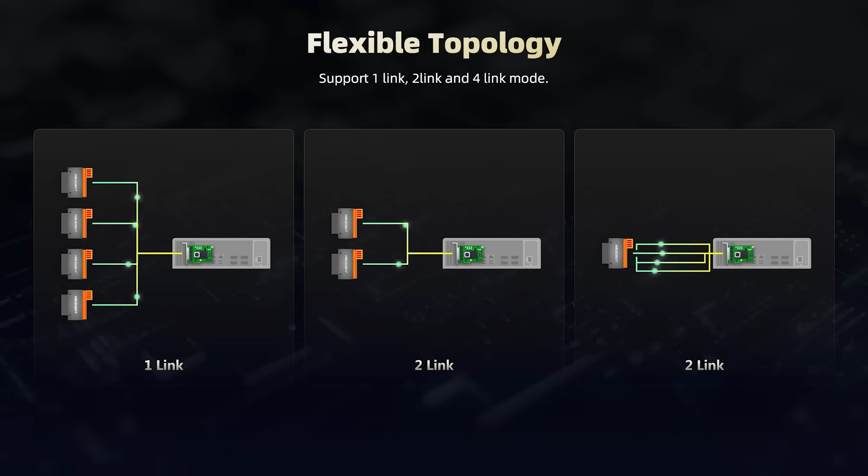Earlier we talked about the CoaXPress data interface with its high bandwidth capabilities, perfect for high-speed applications. However, the data cost can be a little bit high. That is why we are so excited to introduce our X over Fiber interface from Hikrobot. We hope this new interface will better serve our customers with a great balance between bandwidth and data cost.

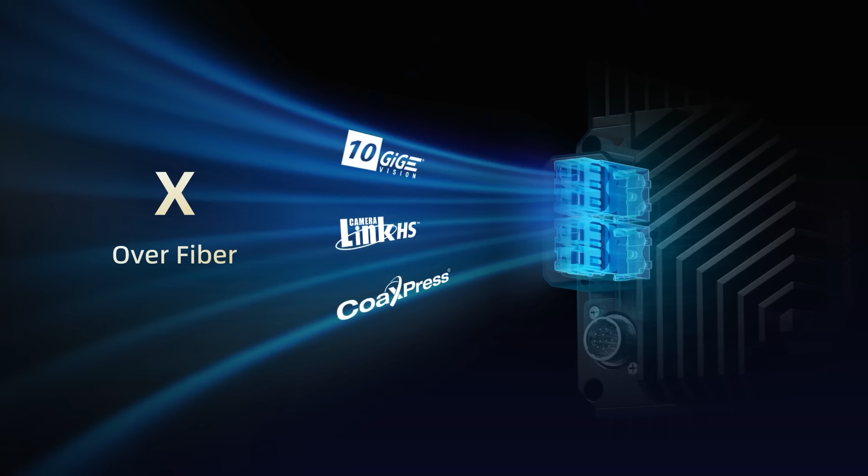Now, you might be curious: what is X over fiber? The second half of the name is pretty self-explanatory, indicating that this interface uses fiber as the transmission medium. But what about the X? In this case, the X represents high-speed interface protocols such as 10GbE, CLHS, CoaXPress, and even higher speed protocols in the future. By using X over fiber, we can standardize both the transmission medium and the form of the frame grabber, making it much easier for customers to choose the compatible product.

Besides its cost advantages, X over fiber also offers several technical benefits. As we can see, typical high-speed interfaces like 10GbE, CLHS, and CoaXPress offer similar bandwidth when using one copper and fiber as the transmission medium. However, since fiber optic links are easily aggregated, we can obtain 2 or even 4 lanes of fiber, providing us with even higher transmission bandwidth.

Moreover, using the X over fiber interface allows for a significant increase in uplink bandwidth. With greater uplink bandwidth, enumerating and connecting cameras can be done more quickly, and commands can be issued with faster response times. Ultimately, this results in a more fluent user experience for high-speed applications.

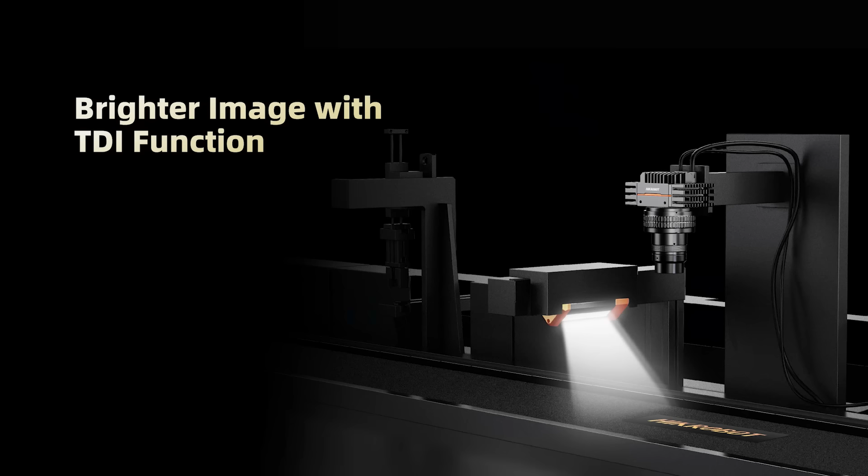As well as a color model with 66.6 kilohertz in RGB pixel format. For the monochrome model, the camera can capture brighter images with the TDI function. This camera supports 2 TDI mode, which will provide images with doubled brightness, meaning the entire system will have a lower requirement for the light source.

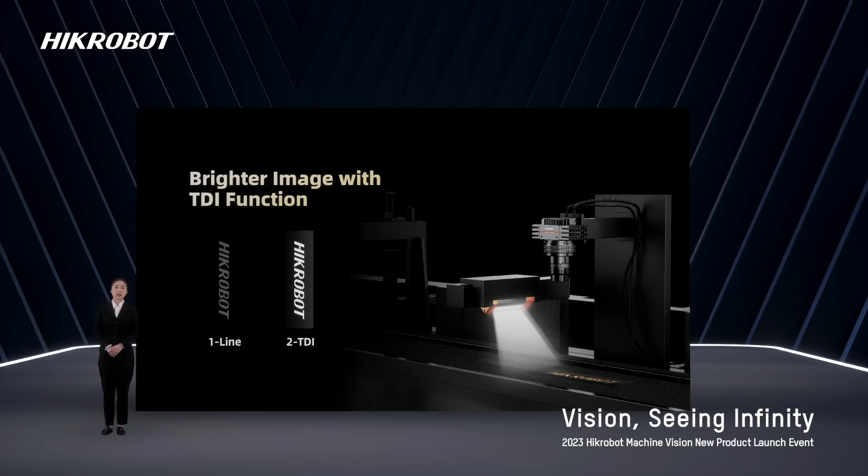Compared to 8K 5 micrometer pixel cameras in the market, our new 8K line scan camera, featuring a 7 micrometer sensor, delivers even better image quality. In one-line mode, there is already a noticeable increase in brightness, but when coupled with TDI mode, the image brightness shows even more significant advantages.

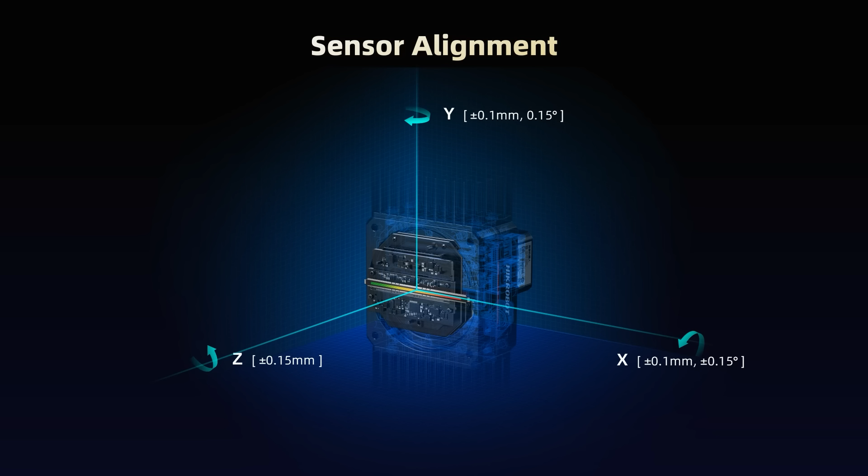In recent years, we have observed an increasing demand for higher imaging consistency among multiple cameras in many line scan camera applications. Therefore, in the manufacturing process of our 8K line scan cameras, we have made improvements by introducing high-precision sensor alignment technology and implementing strict controls on sensor installation. Now, we have achieved higher accuracy in rear focal adjustment, rotation, and translation to ensure imaging consistency.

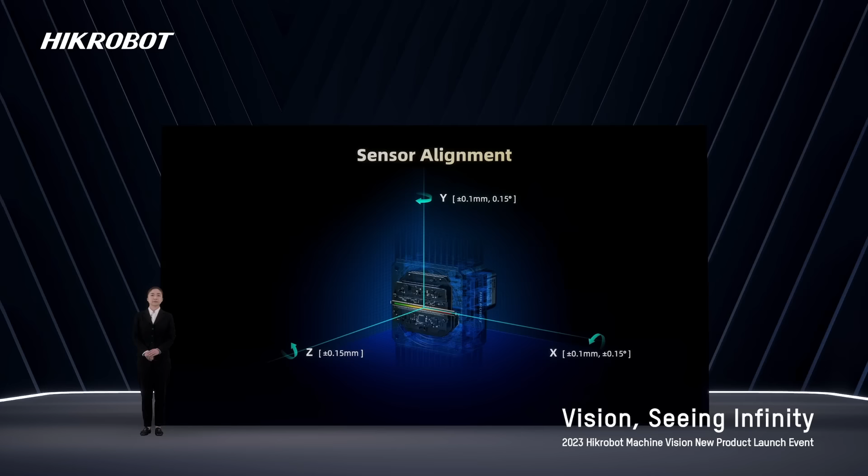Thanks to its high line rate, sensitivity, and true color capabilities, this camera is an excellent choice for inspecting webs on fast-moving production lines, such as printing materials, lithium battery, and other similar inspection applications.

The second line scan camera we have for you is a 16K true color high-speed line scan camera. It employs a 2-link X-over-fiber interface and can deliver a maximum line rate of 47 kHz in RGB pixel format. Furthermore, it also features 2 TDI mode.

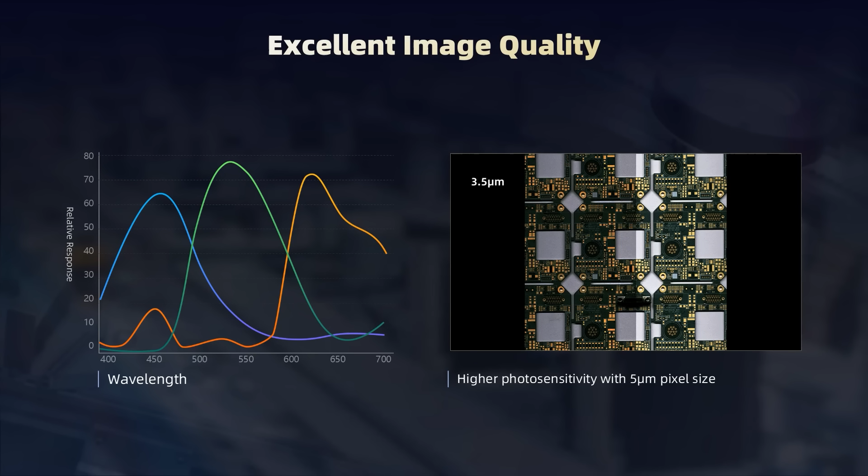Compared to the previous 16K camera with 3.5 micrometer pixels, this new camera has a larger pixel size of 5 micrometer, which makes it more responsive and sensitive. Under the same lighting conditions, the images with 2 TDI mode show a noticeable increase in image brightness.

The camera is also integrated with a rich set of ISP algorithms, including purple edge correction and a super palette, which lead to better color reproduction in general.

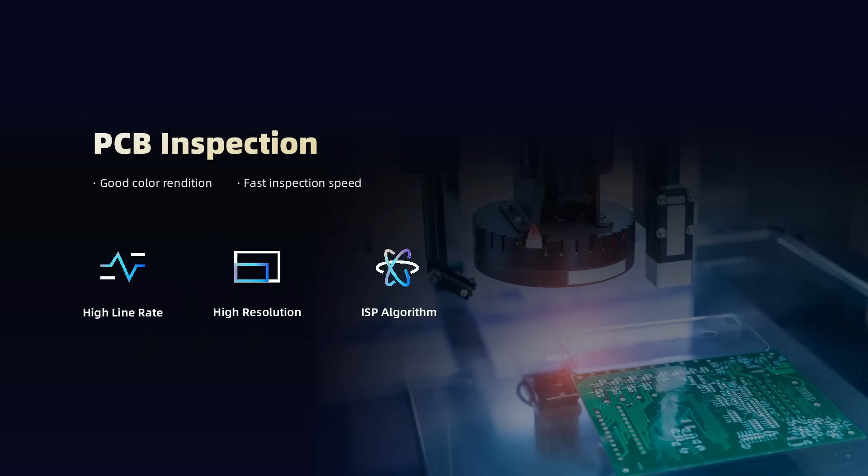In PCB AOI inspections, high color rendition, image accuracy, and fast speed are critical requirements. Additionally, as inspection precision requirements continue to rise, the bottleneck of using 8K cameras for image stitching becomes more apparent, and it's time to upgrade to a 16K camera. This product is an exceptional fit for these applications.

Next up is our final new product of this year's line scan camera lineup, and also the first product from Hikrobot that supports advanced 256 TDI, the 4K high-speed line scan camera. This one is equipped with a 5 micrometer pixel size sensor and can achieve a maximum line rate of 250 kHz.

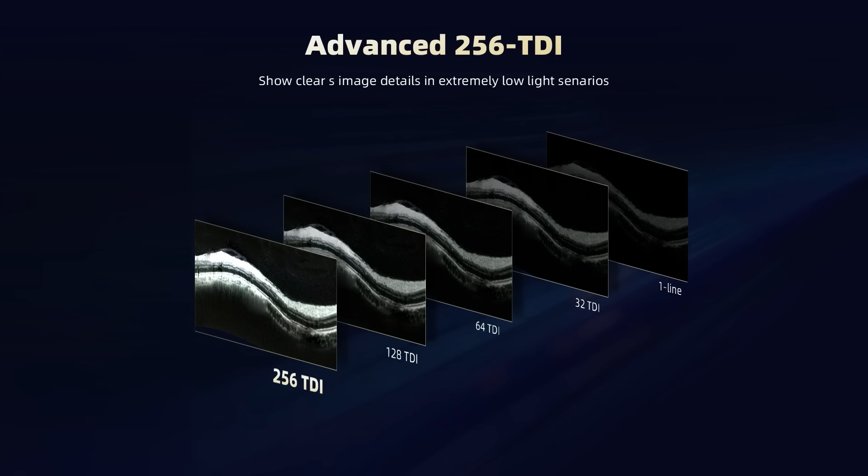Advanced TDI is just like the 2 TDI we introduced earlier, can improve image brightness. However, the 256 TDI takes it a step further for scenarios where the images are very dark, like in medical eye exams using OCT. In these situations, it is difficult to get enough light, and a normal TDI just doesn't do the trick. But with 256 TDI, the overall brightness of the image is greatly improved, especially for critical areas that need clear detection.

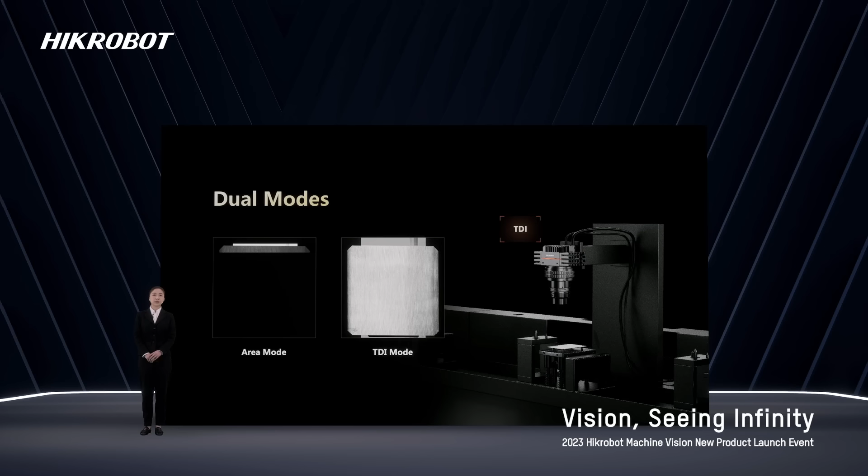This camera also supports dual mode, switching between area and TDI. In line scan camera applications, capturing a complete object requires relative motion between the object and the camera, which can be challenging to perform position calibration during camera installation.

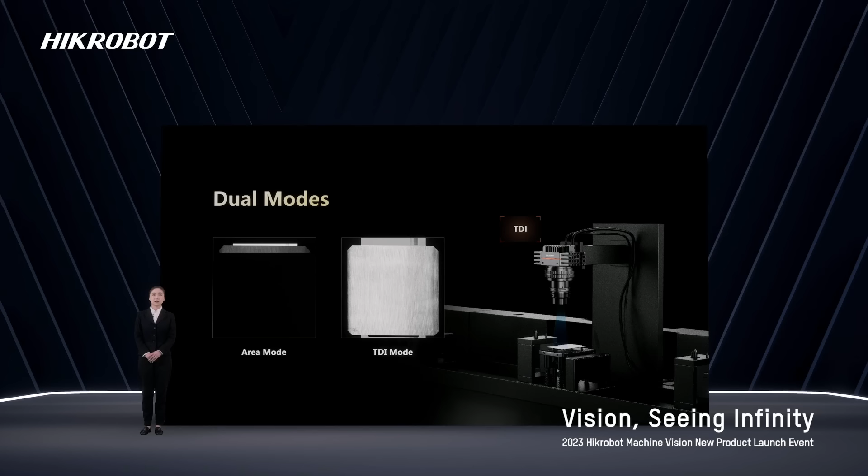To address this, we have developed the area mode for this camera, which means the camera can be used as an area scan camera and output a 4K times 256 resolution image. This image can show the object locating points easily, even when there is no relative motion. Once calibration is complete, the camera can then be switched to TDI mode for normal image acquisition.

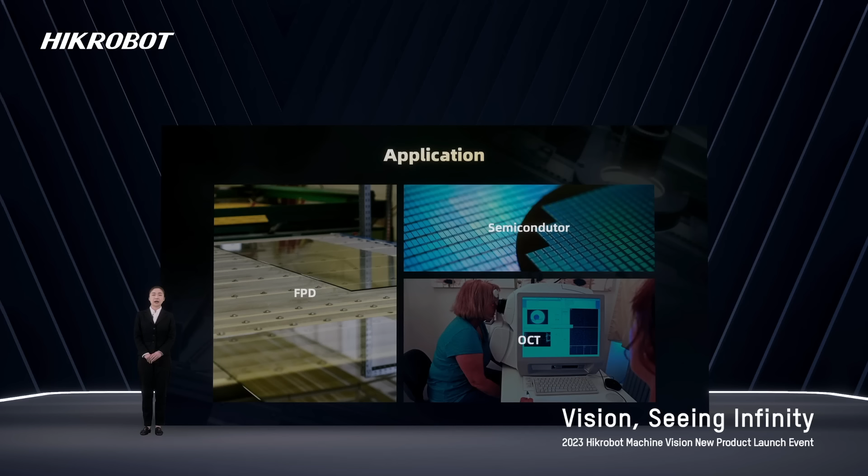The primary applications of this camera are flat panel display inspection, semiconductor wafer AOI, and ophthalmology examination. Beforehand, we presented camera products associated with the X-over-fiber interface.

Now we're thrilled to introduce the X-over-fiber frame grabber. This frame grabber can be used together with the camera products we mentioned earlier, and its dual-port design allows for a maximum data bandwidth of 20 gigabit per second. In addition, this frame grabber is equipped with an FPGA, which eliminates the possibility of data packet loss.

Moreover, several ISP algorithms like Bayer interpolation and color correction matrix are now supported on the frame grabber, which frees up the FPGA logic resources on the camera and the CPU resources on the PC.

Meanwhile, the frame grabber also comes with 24 I/O interfaces that can be flexibly connected to external devices, and signal synchronization between two frame grabbers is achievable. What's more, surprisingly, this frame grabber can be used as a signal generator, outputting signals as user-preset waveforms to trigger other devices.

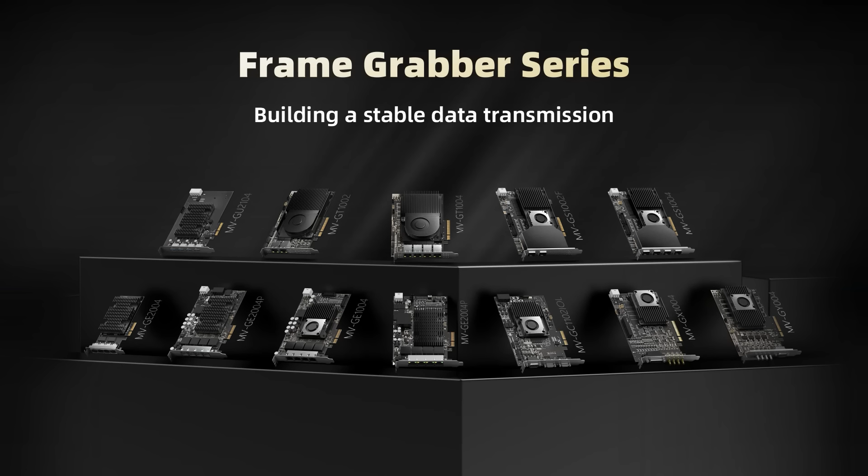In addition to this frame grabber, over the past year since launching the frame grabber series, we have continuously expanded and optimized our product series. Currently we have a very wide range of frame grabbers, offering interfaces including GigE, 10 GigE, USB, Camera Link, CoaXPress, and X-over-fiber.

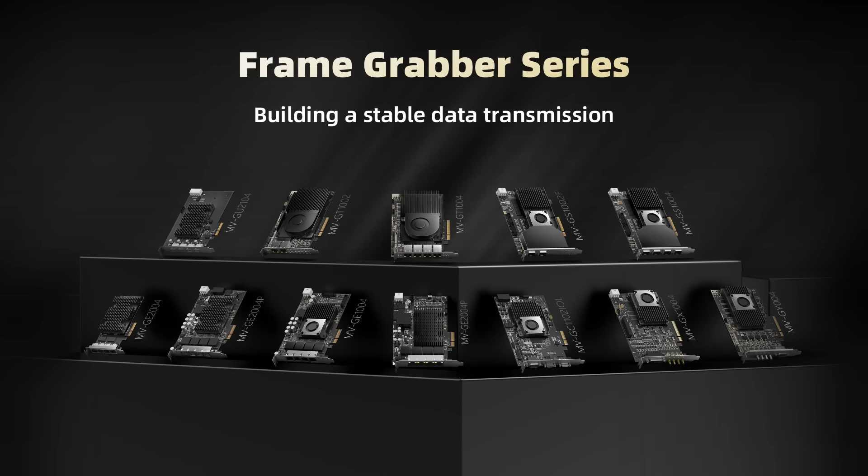For this series, we have made improvements in usability. We will release a toolkit to enhance the user experience. The toolkit consists of a variety of diagnostic tools.

The first one is a PCIe diagnostic tool, which supports exporting the current status of the frame grabber to help monitor and troubleshoot the PCIe bus.

The second one is a device diagnostic tool, which allows for monitoring of the frame grabber status. This includes monitoring I/O status and waveform changes, events received by the frame grabber, and the device running logs produced during use.

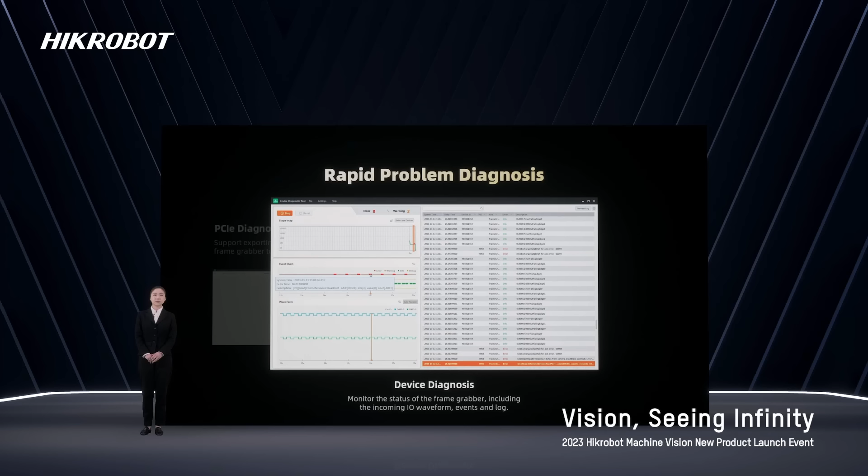The third one is a PCIe diagnostic tool, which enables detection of PC environment variables and the dynamic libraries that the frame grabber relies on. It also supports fast repair for the operating environment, making it easy and simple to use.

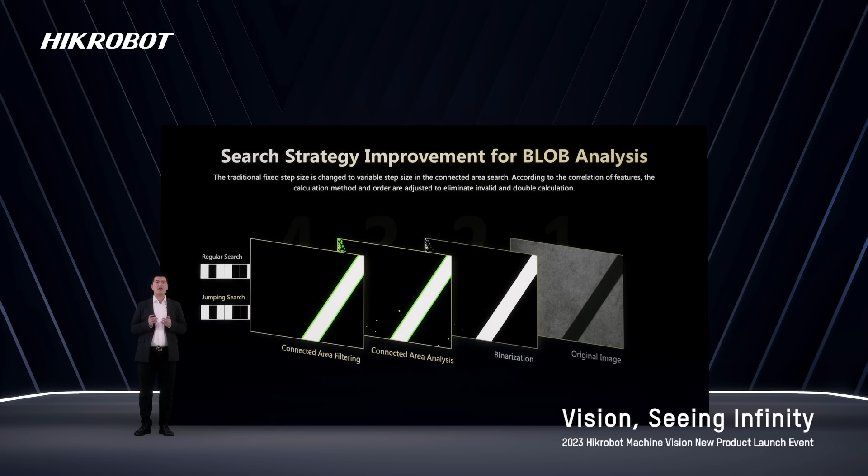Let's move to the blob analysis algorithm, which usually includes 3 steps. The binarization process is relatively simple, and the main time-consuming part is the connected area analysis and the feature calculation and filtering. In order to speed up, we improved the connected area search algorithm, changing the traditional fixed step to

a variable one by calculating based on the image features. In addition, after obtaining the connected area, when getting the features, we adjusted the calculation method and order according to the relevance of the features, eliminating ineffective and repeated calculations in traditional algorithms, achieving the goal of acceleration.

The optimized blob analysis has been improved in terms of time consumption and resource utilization, especially in large resolution images and large target scenes. For example, take the 8K times 12K resolution image. It contains around 80,000 connected areas, and it will only take around 80 milliseconds for blob analysis.

By adapting cache size blocks, deep coding, instruction sets, and assembly optimization, most algorithms in VM 4.3 also have a significant efficiency improvement.

In addition to algorithm efficiency, VM 4.3 has made many improvements in algorithm memory usage. By improving code implementation, operator encapsulation, and other methods, we have reduced the memory usage and redundancy, improved the memory reuse rates, and resource utilization. The memory consumption of most algorithms is significantly lower than that in VM 4.2.

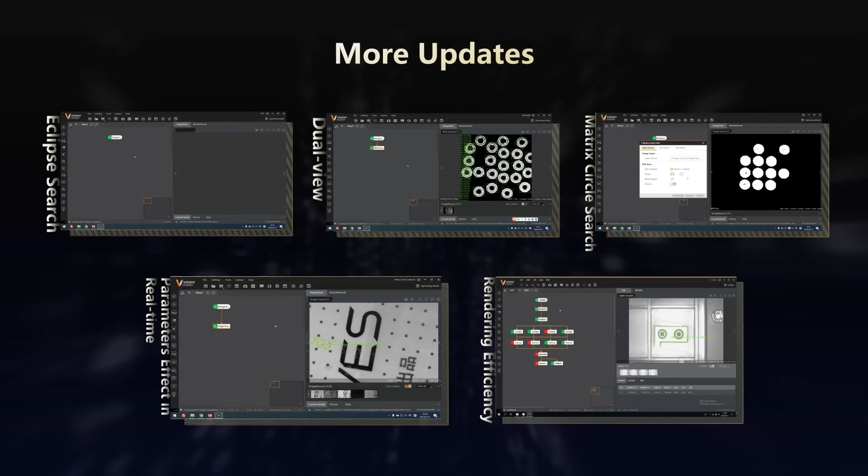Furthermore, VM 4.3 has added functions such as ellipse search, dual view configuration, matrix circle search, parameter effects in real time, and etc. And it optimizes and improves rendering efficiency to make VM more adaptable to diverse application demands.

Let's move to the hardware part. The ID product family has been continuously developed over the years, covering logistics, industry, handheld, and module series. Its performance also has been approved by our industry partners. We have never stopped innovating in terms of product and technology. And this year, we've continuously polished and enriched the series.

Today, we introduce the flagship product of the ID 3000 series, the ID 3000 XM, which shines in terms of performance, size, and usability. The ID 3000 XM is designed with various forms of status indications, such as top, side, and projected light. The current coding status can be observed easily from different angles, making it adaptable to more installation methods.

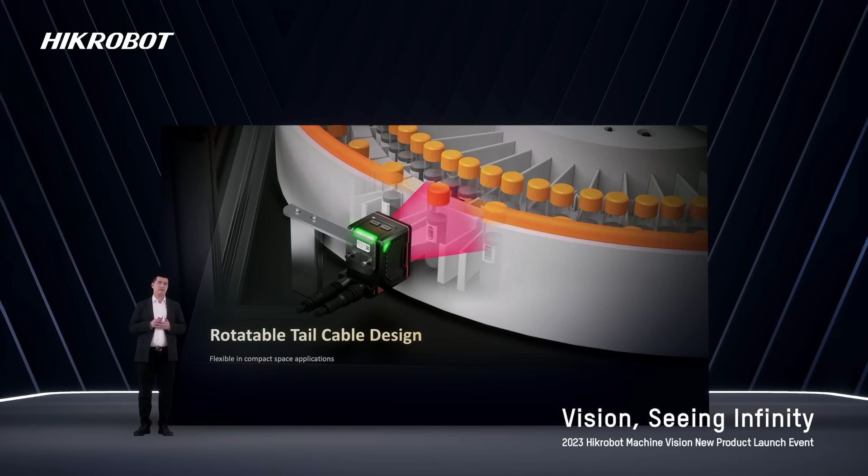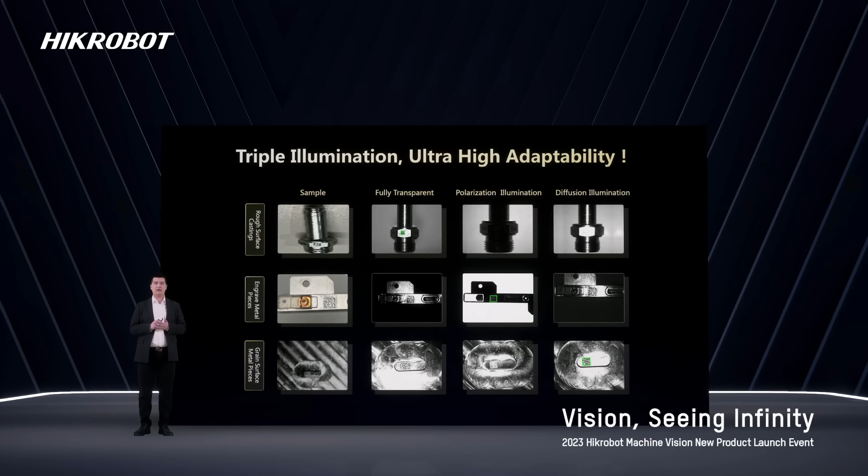The small size and rotatable tail cable design makes it easy to install in compact spaces. In terms of imaging, the ID 3000 XM uses polarized, diffused, and fully transparent lighting design. The triple optical design enhances the adaptability to complex scenarios and changes on industrial materials.

In addition to dozens of existing codes, the ID 3000 XM also supports new codes such as micro QR and pharmacode with richer coding capabilities.

The integrated installation method can reduce the working distance by 40 millimeters, making it adaptable to more compact device spaces. After installing the uniform light cover, the ID3000XM provides more uniform illumination, significantly improving code reading rates and stability.

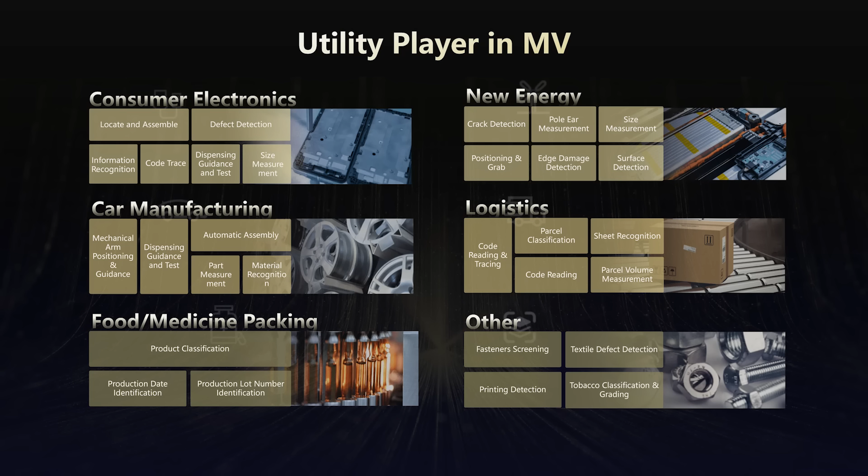The high computational power and the strong flexibility of the SC6000 AI smart camera can be widely used in positioning, measurement, recognition, and detection in various industries, making it the best choice for single-camera vision systems. We believe that we will see more smart cameras in increasingly diverse scenarios in the future.

The proportion of deep learning technology in machine vision is increasing. The application of deep learning projects generally involves multiple aspects, such as sample collection, management and labeling, model training, and on-site deployment. As deep learning applications are widely promoted, the management complexity of deep learning data is increasing, and a larger amount of manpower is required for the mentioned steps. In addition, a strong model training environment cost is also very high.

In order to deal with these difficulties, we have integrated the data with project management. We have developed an AI training platform with a complete deep learning application process and provided multiple deployment methods such as public cloud, private cloud, and standalone deployment to meet the needs of different application projects.

On the AI training platform, project managers can manage and control members and permissions according to the project, as well as uniformly manage project data sets and models. In addition, the standalone version of Vision Train and the online version of the AI training platform can achieve data exchange. The AI training platform supports model training for various edge devices such as VM, SC smart cameras, ID code readers, and 3D cameras.

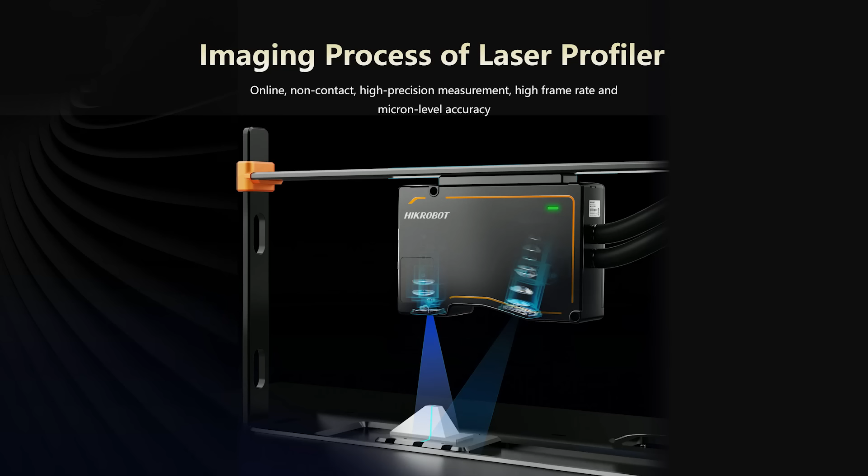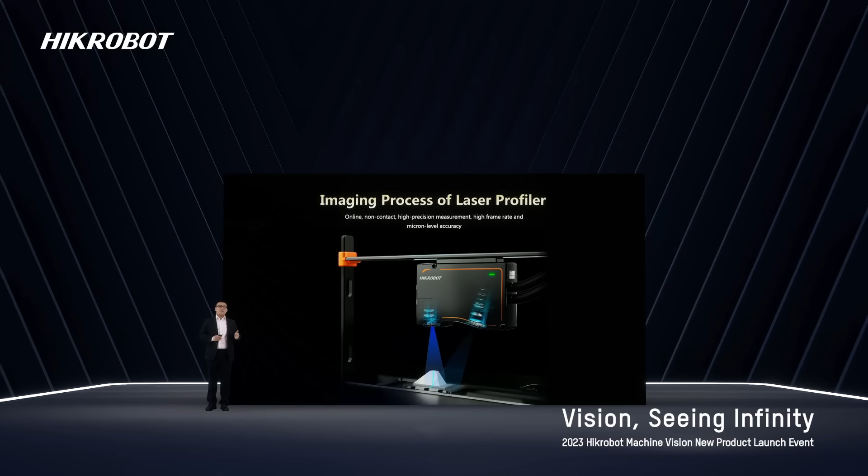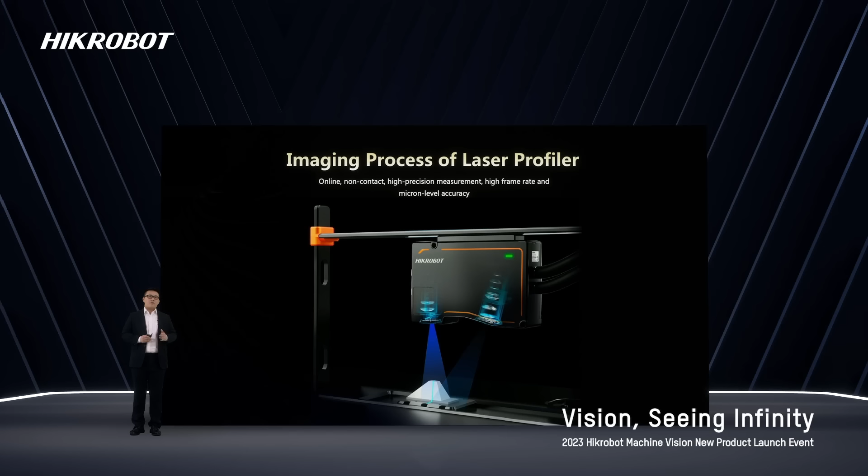The Laser Profiler uses the principle of line laser triangulation to obtain 3D information of the measured object. Firstly, the Laser Profiler projects a fine laser line onto the surface of the object, and the laser line reflects to form a contour line. Then the contour line is imaged through a lens in the sensor component and collected by the laser profiler. Furthermore, the processing unit of the sensor calculates and restores the depth information of each point on the laser contour line according to the principle of triangulation. This principle is also referred to as the light sectioning method.

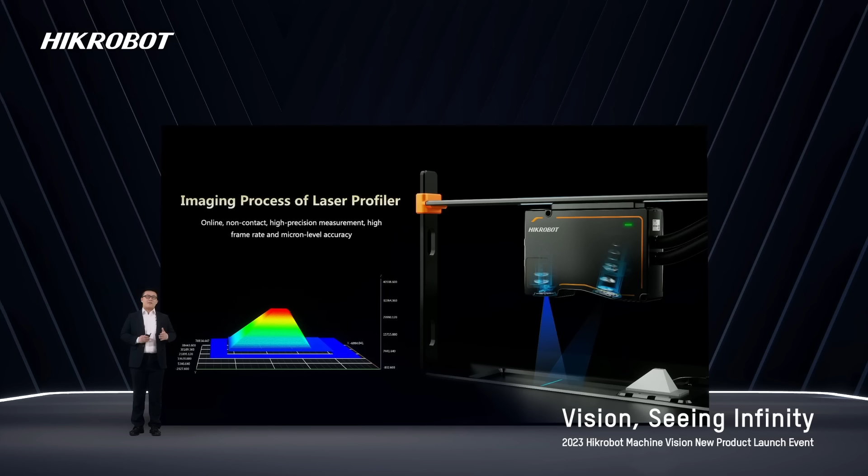When the object moves relative to the laser profiler, each contour of the object along the direction of motion can be sequentially collected and calculated by the sensor, thus dynamically restoring the complete 3D information of the measured object. The characteristics of dynamic scanning and collection during object motion make the laser profiler widely used in online 3D measurement in the production process. A good product must go through careful design and refinement to ensure product quality.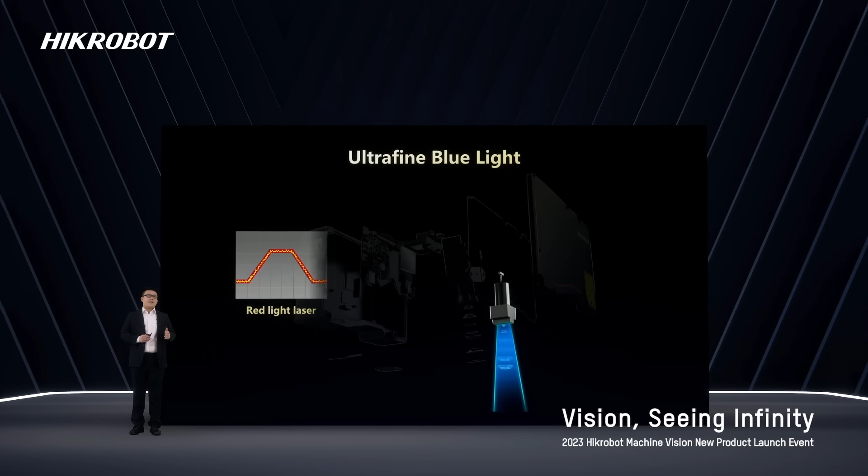Next, I will analyze some of the precise design of our laser profiler. Firstly, the 405 nanometer ultra-uniform and refined blue light ensures accurate extraction of laser contour lines. Secondly, customized large aperture lenses are used, with a light flux equivalent to 4 times that of ordinary lenses, ensuring extremely high MTF resolution.

Third, a dedicated sensor with high sensitivity and a dynamic range of up to 90 dB is used to ensure excellent imaging even in extremely complex scenes. Fourth, through Scheimpflug optic design, achieve clear images throughout the full range. With precise optic adjustment, the laser, lens, and sensor work together perfectly to ensure high-quality imaging of the laser profiler.

Finally, our laser profiler adopts an integrated design with built-in computational power, and the camera is equipped with a high-speed processing unit, enabling a processing speed of up to 19 kHz.

To fully utilize the capabilities of the laser profiler, powerful algorithm processing is required in addition to the finely designed hardware. For line laser triangulation, the core algorithm is the extraction of the center point of the profile line. A highly robust extraction algorithm enables the sensor to easily handle various complex scenarios. Building upon the center point extraction algorithm, further integration with sub-pixel processing algorithms can improve the extraction accuracy up to 0.05 pixels, thereby enhancing the sensor's Z-axis detection precision.

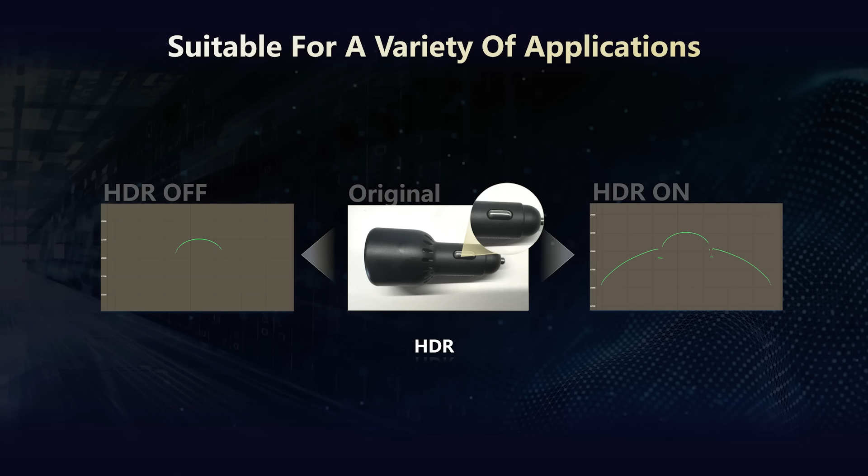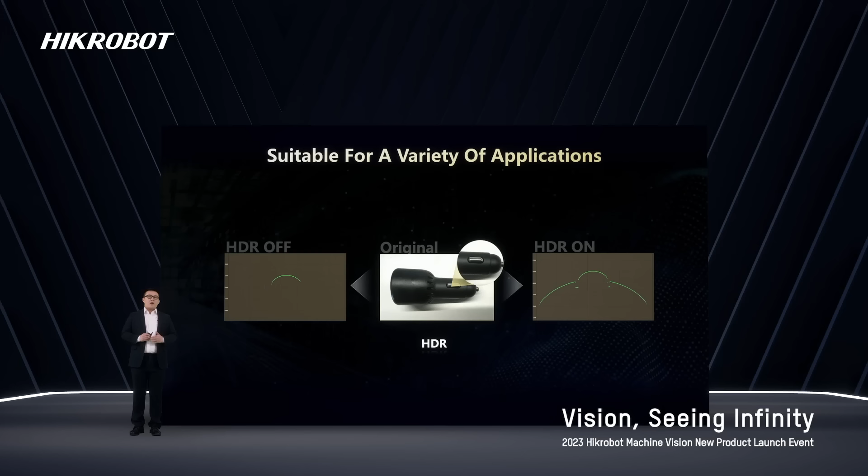As a standardized industrial product, the laser profiler needs to deal with 3D data acquisition of various materials. Wide dynamic processing algorithms can adopt different exposure parameters for materials with different reflectivities, and then perform fusion processing, allowing the sensor to simultaneously extract profiles from highly reflective and light-absorbing materials.

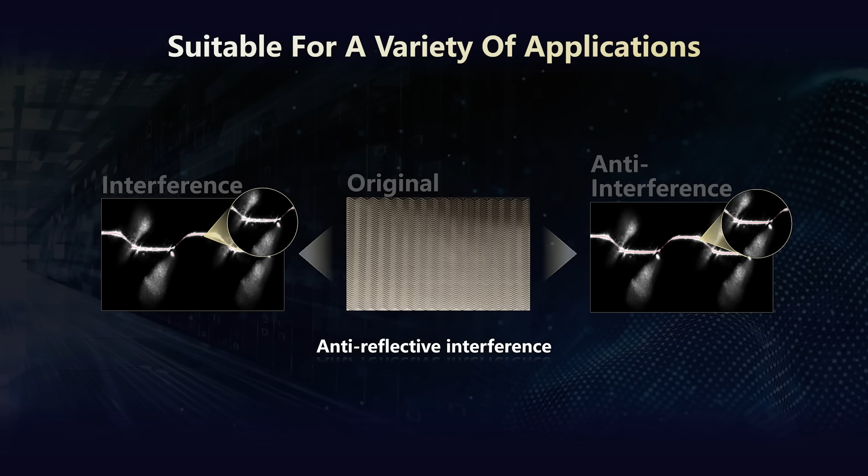When dealing with metal surfaces, specular reflection can cause errors in center point extraction, especially for stray light with multiple metal surfaces such as threads and pins. However, anti-reflection algorithms can effectively reduce this impact.

The 3D data collected by laser profiler usually requires further post-processing for better algorithm analysis. We have built-in rich post-processing algorithms on the sensor side, including spatial filtering, temporal filtering, point filtering, bidirectional interpolation, edge extension, etc., which are convenient for customers to choose and do not occupy the CPU resource of the host.

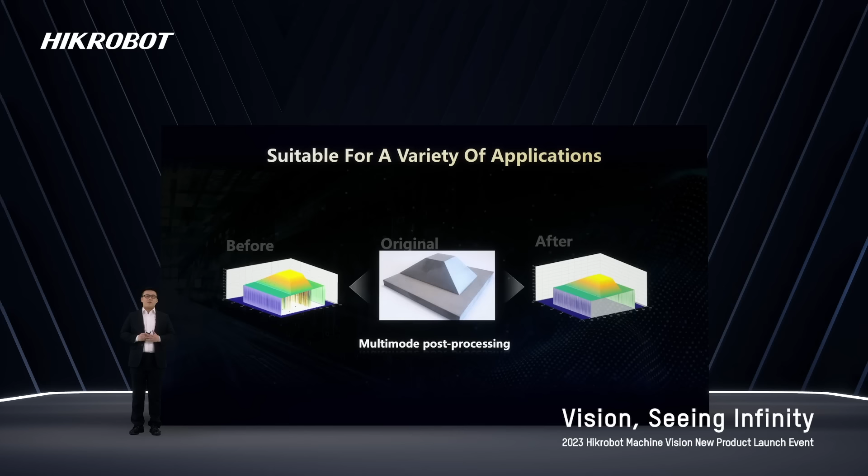Our laser profiler adheres to the principle of simplicity and ease of use, providing rich data interfaces to output profile data, point cloud data, depth maps, and brightness maps.

It's also compatible with various trigger modes, supporting differential encoder trigger input, including line trigger, frame trigger, and line plus frame trigger application modes. Through the SDK, our laser profiler can be easily integrated into third-party software frameworks.

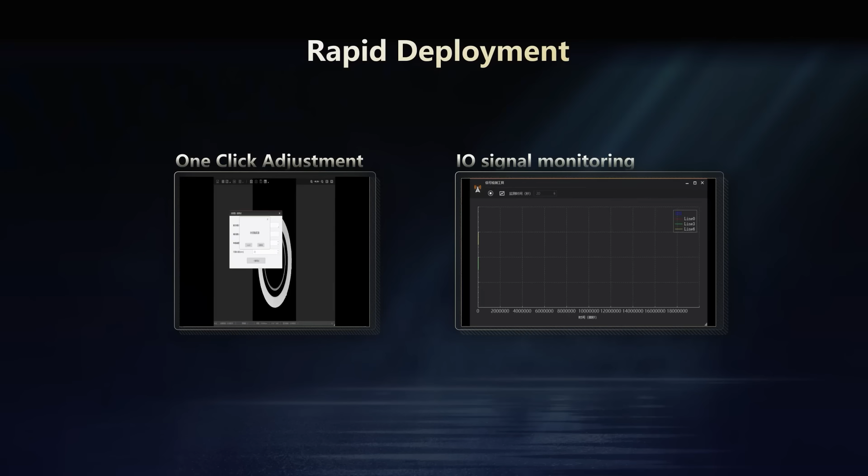We offer 3 language versions of SDK: C, C#, and Python, as well as more than 10 integrated sample programs, including mainstream visual analysis software for user secondary development.

In addition, in our client software, we have simplified the adjustment process of the depth map, supported one-click debugging, and provided an I/O signal monitoring tool to facilitate on-site rapid debugging and deployment.

The DP2000 laser profiler series includes 5 different field of view models with 2,048 points per profile. The highest acquisition frequency can reach 10 kHz, with an x-axis measuring range of 22.2 to 798 mm, z-axis repeatability of 0.4 to 2 micron.

And a linearity of approximately plus minus 0.01%. The DP2240 and DP2470 models support optional versions with red and blue laser light.

The DP3000 series is a laser profiler series positioned higher than the DP2000 series. Firstly, the DP3000 series has an upgraded profile point count of 3,200 points and a maximum detection frequency of 19 kHz.

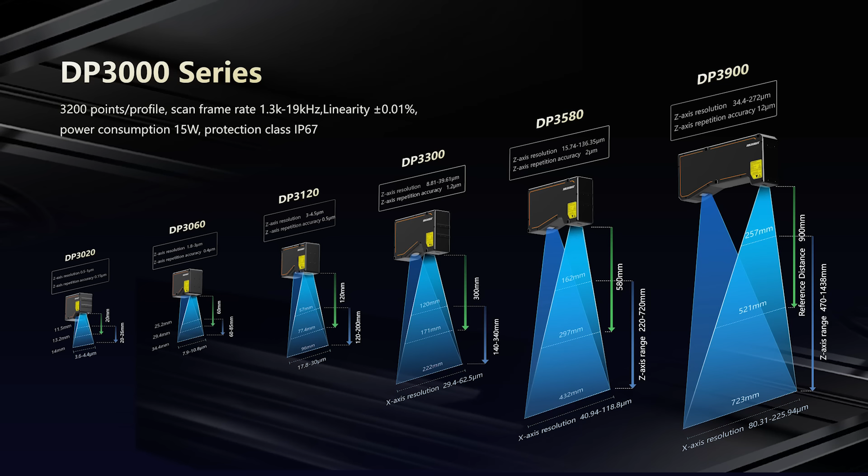Secondly, thanks to the sensor's support for single-frame HDR and the improvement of its photosensitivity characteristics, the DP3000 series has stronger detection capabilities for different scenes or materials.

Finally, in the direction of ultra-high precision measurement, we released the DP3020, covering an x-axis width of 11.5 to 14 millimeters, and achieving a z-axis repeat accuracy of 0.15 micron.

The continuous increase in production capacity in the lithium battery industry has placed increasingly high demand on automation. 3D vision technology is mainly applied in the battery cell production process, including detecting welding defects in the tab before it's sealed into the cell, measuring the size of the top cover weld seam, and detecting defects in the surrounding weld.

After the cell is sealed, measuring the size of the top cover, detecting the deviation of the sealing nail after injection, detecting welding defects, and conducting a six-sided visual inspection of the appearance before assembling the battery pack.

Taking the six-sided inspection of square shell lithium battery as an example, a series of defects such as scratches, dents, and bulges will all pose safety hazards to the subsequent use of the battery. So quality inspection of the finished battery cell is essential.

The innovative 3D plus AI approach effectively meets the requirement of the six-sided inspection of square lithium batteries, achieving a detection effect with zero misdetection rate, low misjudgment rate, and high efficiency.

In addition to battery six-side inspection, our laser profiler has achieved good results in applications such as top cover size measurement, top cover explosion-proof valve flatness inspection, top cover weld seam inspection, and bus bar welding defect inspection, fully covering 3D applications for all processes in lithium battery cell production.

Let's look at the auto parts industry. 3D applications are mainly focused on precision device measurement, pin detection, and seal inspection, all of which have been widely applied. Specifically, for the pin detection issues of pin sorting and the deformation problem of seal ring inspection, we have developed dedicated algorithms to reduce the difficulties of building solutions and improve the efficiency and effectiveness of inspections.

In the 3C electronic industry, 3D vision has been widely used for a while, mainly focused on measuring flatness, coplanarity, gap width, and step height of consumer electronic products. This technology has played a key role in improving the quality of 3C electronic products.

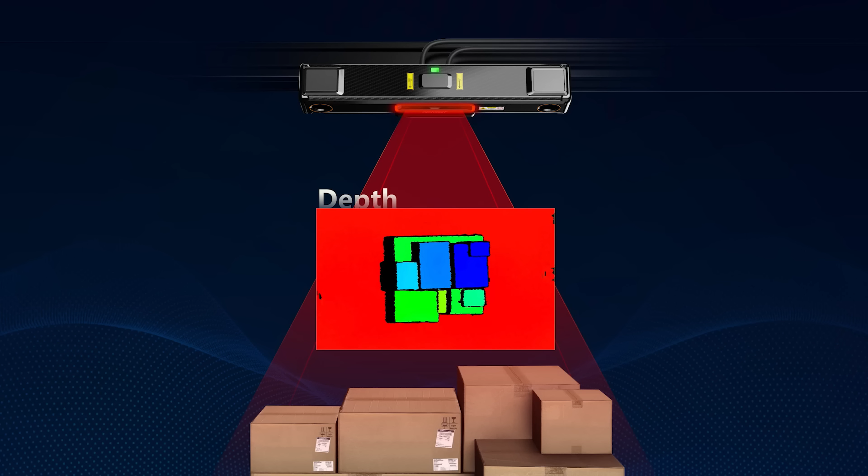Let's take a look at the speckle structure light stereo camera. The camera projects speckle texture onto the object to be tested, and the images are captured simultaneously by two IR sensors. After binocular matching calculation, the depth map of the object under test is obtained.

The camera also has an RGB sensor, which can capture RGB images and the depth map of the object at the same time. Moreover, the RGB image and depth map are aligned on the coordinate axis and synchronized on the time axis, making them convenient for analysis and use.

Let's review the DB500S and the DB1300A that were released last year. The DB500S is designed for conveyor belt applications in the express delivery industry, used for various applications such as single-piece separation, grayscale removal, and robot packaging. The DB1300A, on the other hand, is specifically designed for warehousing and logistics, covering a pallet size of 1.2 meter times 1.2 meter times 1.8 meters, and mainly used for applications such as depalletizing and large volume measurement.

This year, we will continue to launch the DB300S with a smaller field of view, mainly for shorter working distance, as well as the DB700A with a field of view between the DB500S and the DB1300A. These four models form a complete product series.

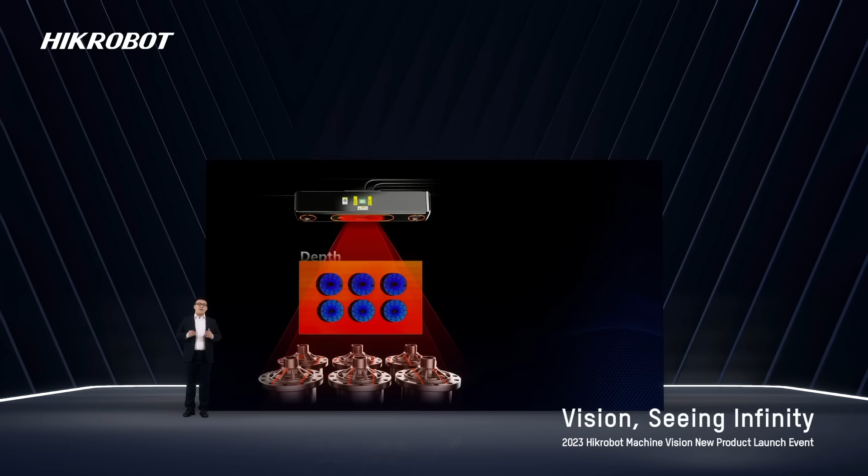The laser galvo scanning camera series is specially developed for workpiece applications. Unlike the speckle camera which projects speckle texture, the laser galvo scanning camera projects a set of laser lines and uses a mirror to swing and scan the laser lines.

Similar to the speckle camera, the galvo camera also acquires a series of laser line patterns through two IR sensors to generate a depth map, and synchronously captures an RGB image through an RGB sensor, ultimately obtaining a synchronized and aligned RGBD map.

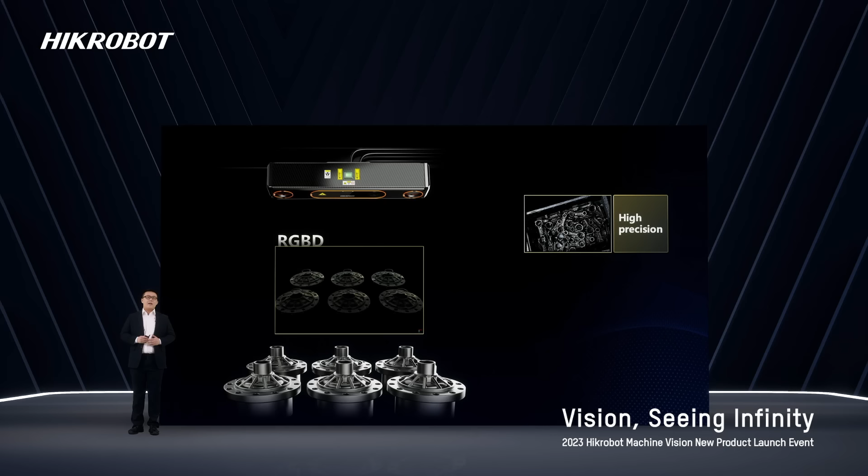Thanks to this design, the projected energy of the laser lines is more concentrated, and the sub-pixel processing algorithm can be used to further improve the accuracy of laser line extraction, resulting in a z-axis repeat accuracy up to 10 micron for the laser galvo scanning camera.

In addition, the camera adopts a high dynamic range optic design, automatic exposure, multi-frame fusion, and other algorithms to further enhance the characteristics of anti-high reflection of metal surfaces and anti-environmental light interference, making it very suitable for obtaining 3D information of metal objects. The laser galvo scanning camera series is a product line that we are focused on.

DLS 600P was introduced to you last year, which is designed to align with the material frame range, mainly for the application scenario of grasping workpieces in the material frame.

DLS 1400P has the widest field of view, with a working range of 1.5 to 3.5 meters, which can effectively handle the grasping of large workpieces and the need for depalletizing.

DLS 300P has a smaller field of view and mainly works at a distance of 0.4 to 0.8 meters, with a maximum coverage range of 0.6 by 0.46 meters, mainly used in assembly scenarios.

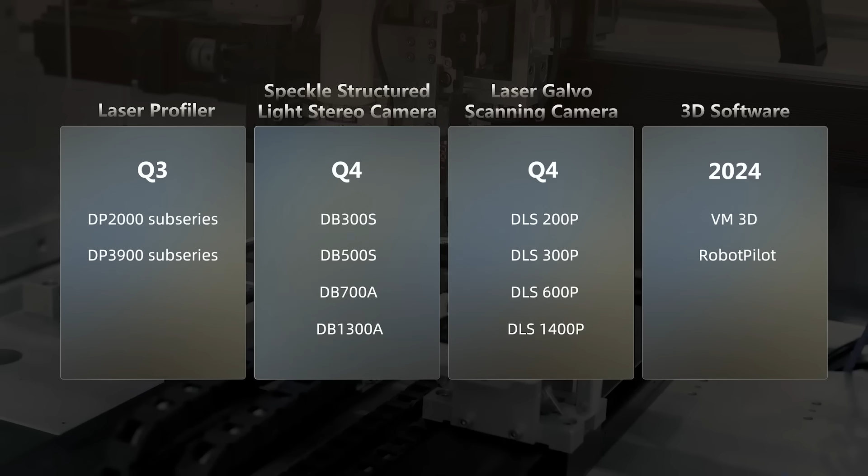Finally, let's take a look at the mass production timeline of 3D vision products. DP2000 and DP3900 sub-series of laser profiler will be released in the third quarter. For the speckle structure light stereo camera series and the laser galvo scanning camera series, these cameras will be released in the fourth quarter. In addition, we will also release two complementary 3D software products, VM3D and Robot Pilot. Both of them will be launched in 2024.